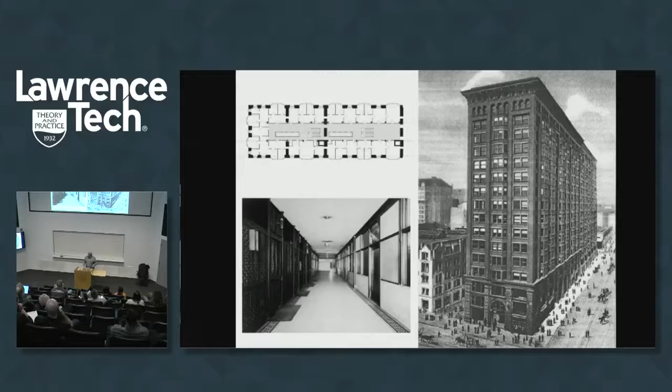Once air conditioning became so widely used, we suddenly just became ignorant as architects. We just said, you know what, we got air conditioning, just do whatever. And this building, the Seagram Building, beautiful building, but its plan has nothing to do with performance.

If you compare those two, just look at the lobby space between the two. There's not a single window in the Seagram Building. There's no natural light. Everything is artificial. So it's like, what do we really want to do? What kind of spaces do we really want?

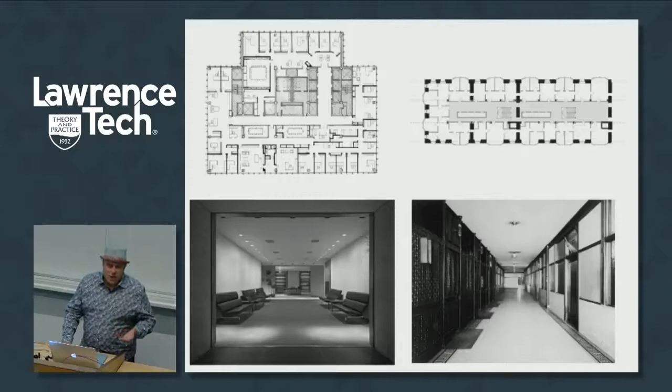So I look around at other things. There are a lot of great examples of buildings that we can learn from, and this is one thing I want to talk to you a little bit about tonight, is about looking.

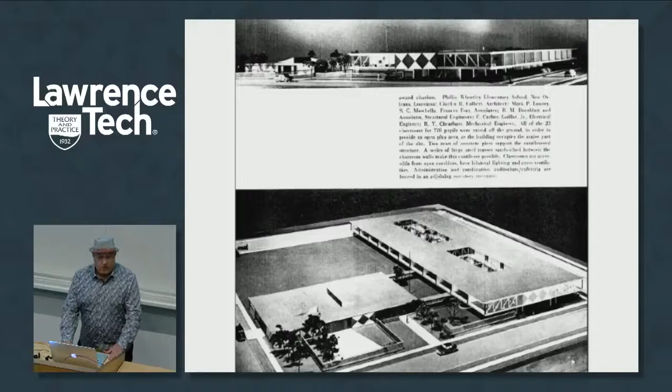This is the Phillis Wheatley Elementary School in New Orleans, done in 1953 by Charles Colbert. And it's a beautiful building, but if you look at the plan, it's almost exactly like the Monadnock. And it was that way for a reason, because it was designed without air conditioning. It's this wonderful building with lots of natural light, cross ventilation, and really, really a beautiful building.

And this building was around for the longest time until some smart person said, you know, it's a little warm inside here on days. We should just put air conditioning in and it'll be a lot better. Well, this is what it looks like now. So what happens is the building's not designed to be air conditioned. And so as soon as we feel a little bit uncomfortable, we want to throw things away. And this building will probably face the wrecking ball here very quickly.

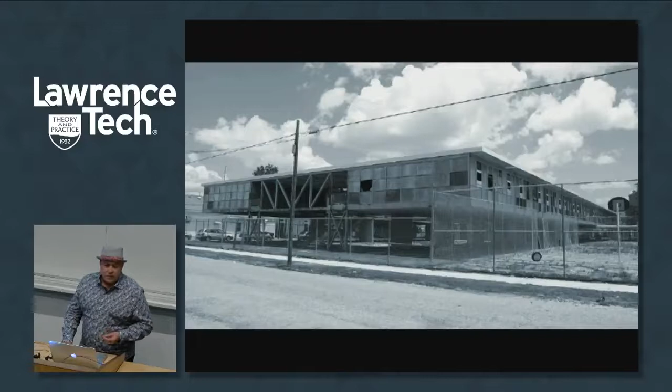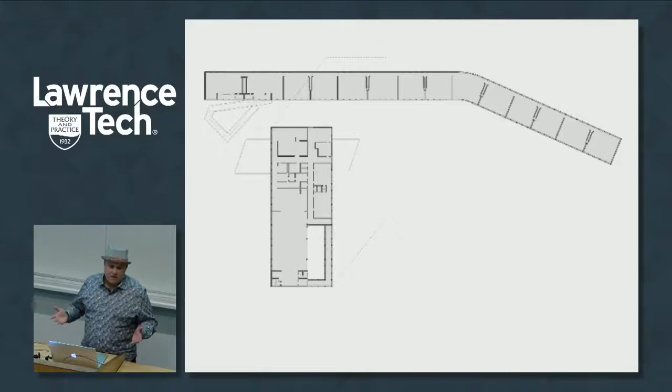Another building also in New Orleans, done by the same architect about the same time, another school, is a brilliant design in New Orleans, raised up, created a shade porch. And if you look again at the plan, those two little lines in there are actually a stair, goes directly up. No circulation in the building at all. Glass, cross ventilation both sides. It's just pretty magical.

So point is, what I tend to do is when we start a project, I look at other things. And I'm showing you some of the things which were some of our research before we did a school in LA. And so we did this small charter school. It's a 500 student school in a very tough neighborhood in South LA.

This school is built on a site that is 1/15 the size of a typical school of its size. So it's basically an infill lot, but it has a lot of those things that I just talked to you about. If you see the plan, the long arm faces into the prevailing breezes, so it actually scoops the air between the building and induces airflow through that passageway in the middle. It's also south down below, so the building actually is shaped to shade the public space outside to the north.

So this is kind of a diagram of it. It has 600 solar panels built into the south facade. And you can see the courtyard to the north. My staff actually put the shadow on the wrong side. We can build them, but we don't know how to draw them.

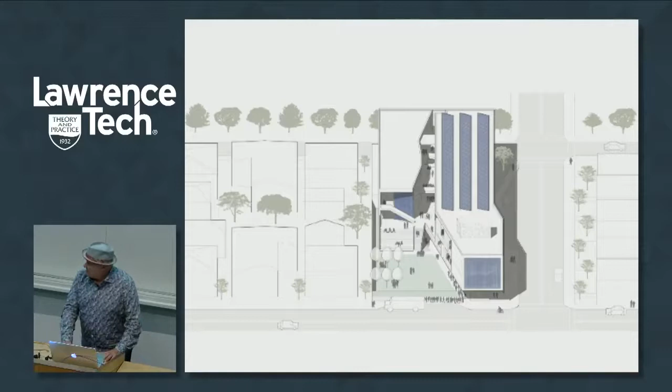The building, as you look at it, you can see the north side shaded. The west looks like it's solid. This is what the west facade really looks like. It's a very sculptural piece of the building, but it's just 2-inch steel fins, and they're spaced in a way that they provide soft natural light into the building. And so you get classrooms which have views, they have privacy, they have natural light. They rarely turn the lights on in these classrooms.

And this building, because of its low usage of lighting and the solar panels, produces about 80% of its own power. But I always look at these things too as an architectural opportunity. The idea that it can be both performative and aesthetic really has made it almost impossible for our clients to value engineer our projects.

So like in this case, they're like, wow, the solar panels cost a lot of money to put on there. So I said, all right, let's take them off and see what happens. Well, we took them off and reran our energy calcs with no shade on the south facade, and the mechanical system cost went up almost to the cost of the solar panels. So the client said, oh, now I get it.

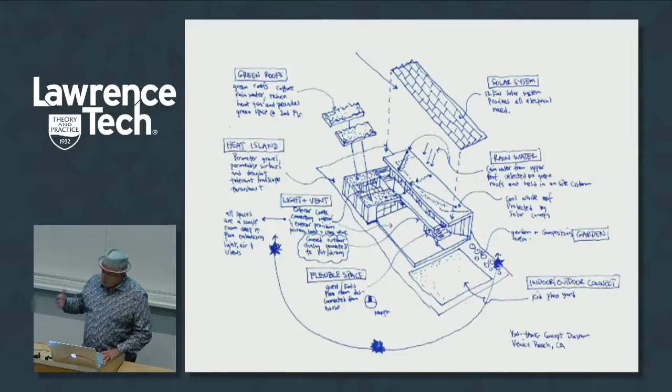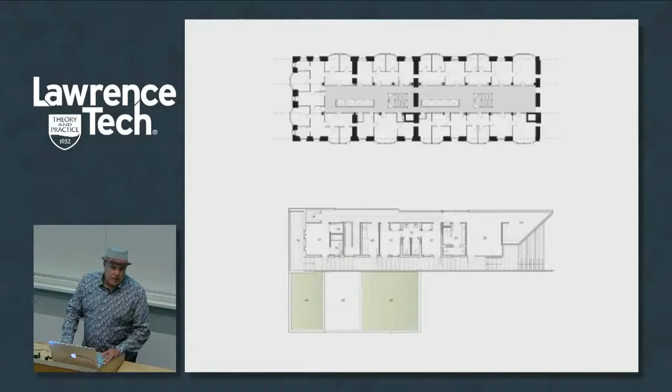So on a different scale, this is a house in Venice, California, and it embodies a lot of those same things. If you look, the upper roof has solar panels, the lower roof has a green roof. All the rooms are single cross ventilation. You could see kind of the plan here. Every room is just one room deep, and it has either a courtyard or air can pass through both sides. So you can see, again, it's very close to the same principles that you would find in the Monadnock building or many other buildings from that period.

This is how you enter. You come through a courtyard. This is their office space. And again, it cross-ventilates through that courtyard. And if you're in the office, you can actually see through the living space. So they can be in the office, watch their kids in the backyard. They can even, when they open the doors, yell to them from across the house.

And then the whole building actually opens to the garden. You can see the green roof. And the bedrooms are small. We basically made the bedrooms really small on this so we could put most of it in the public space. All of them open out to this walkway. The parents' room is on the very end, so when the kids try and sneak out, they got to get by the parents there. But you could start to see the solar panels emerge on there, the green roof.

And then these are the bedrooms, again, all shaded, small, lots of light. I always say to people, who doesn't like natural light in here? Who hates fresh air? It's just common sense to do it. So we kind of do that on everything, even when our clients don't care about it. So there's the house, and we made it like a sort of big villa. It's 2 stories, but we made it look like a big 1-story villa. And you could see the shade pattern on it, that all the openings are protected.

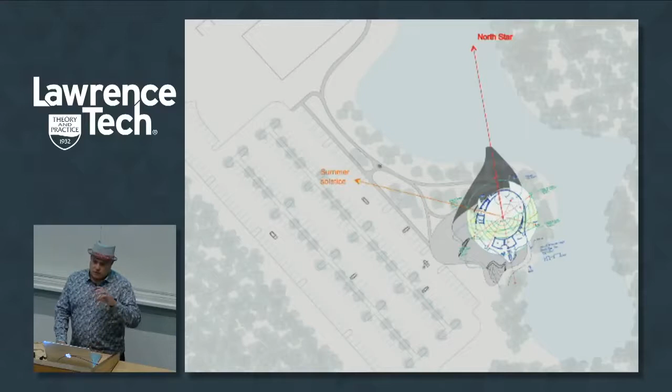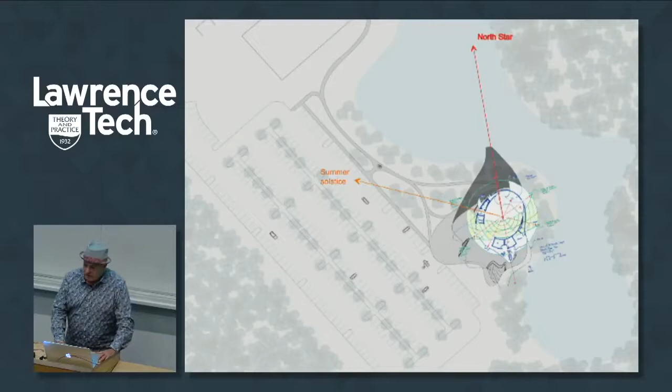We kind of looked to more things, even, well, you'll see it here in a minute, how we placed the building on the site. So where we had not just the view to the North Star, but we also made the building so that the summer solstice would go right through the building. So one time a year, you could actually stand outside the building and see the sun setting through the building.

We also just finished this building in Cedar City, Utah. It's a $50 million arts complex, and they've got these beautiful, red mountains there. And if you visit, the sandstone just from the weathering is just spectacular. So I started to think a bit about that sandstone formation.

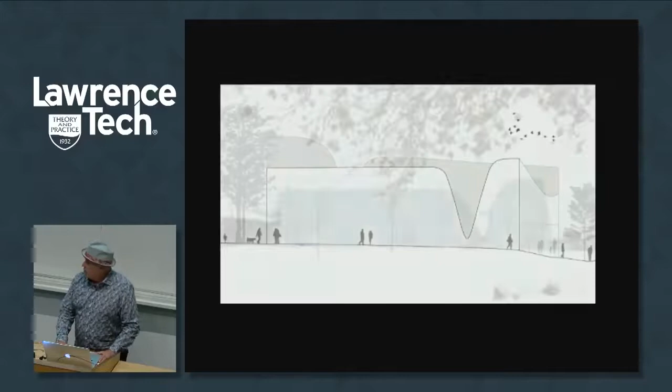That's our site. And so we started to look at these things and how you might be able to transform a building that was a lot like the slot canyons that exist in the neighborhood. So we looked at ways really to have our building be kind of part of the environment that's there. So this part is the museum.

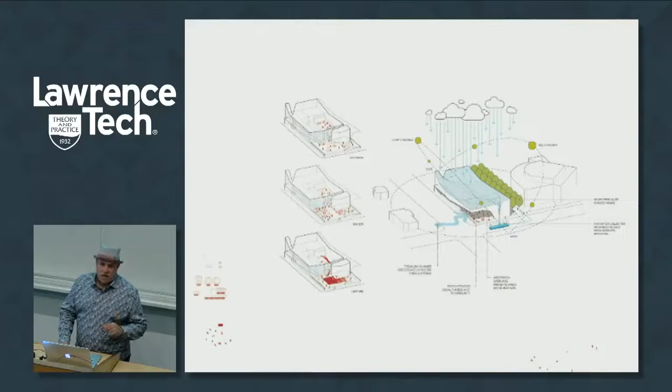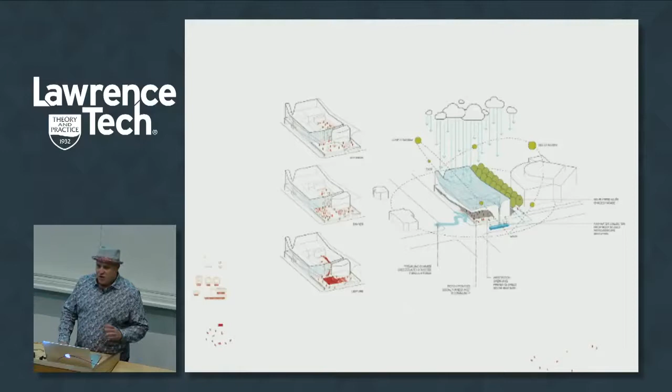It's 30,000 square feet. It's got a big canyon-like roof that has no roof drains in it. They all drain to the two ends of the building, and all the water's collected in cisterns. But my client was very suspect that you're going to put no roof drains in the building. But we kind of worked through that geometry, how you can get all the slopes to flow. And part of it is really figuring out how to build it as well.

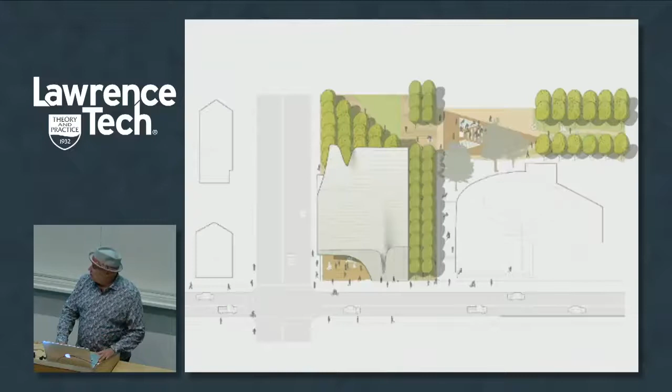So here it is on the site. And I'll show you a little clip of a bit of the construction of that so you kind of get the idea. So it's got the big porch that you're seeing in the front.

Another thing here I'll talk to you a little bit about in a minute is, how do you actually make these forms, or how do you construct them as well?

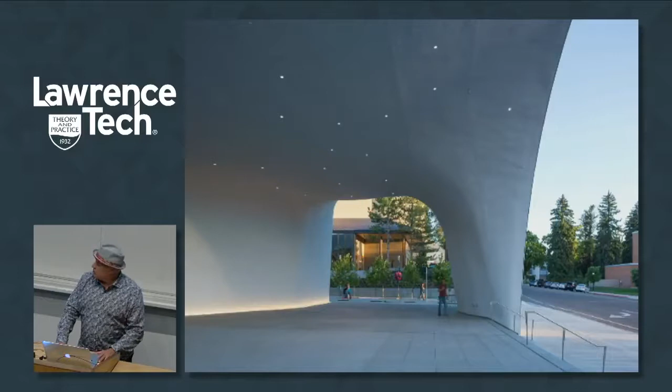So here it is. You can see the big porch, the gallery, and it also has the whole gardens that go with it. But they use this porch here for outdoor performances and events and so forth. And it really connects the campus to the city of Cedar City.

Another thing we've kind of been looking at is this idea of pattern making. And I don't think we really look at those opportunities enough. And I think there's great potential in architecture with pattern making. I mean, they do it with fashion. They make these custom dresses, and they're able to be repeated or altered in a way over and over again. So I kind of started to think more about how can pattern making be part of making architecture.

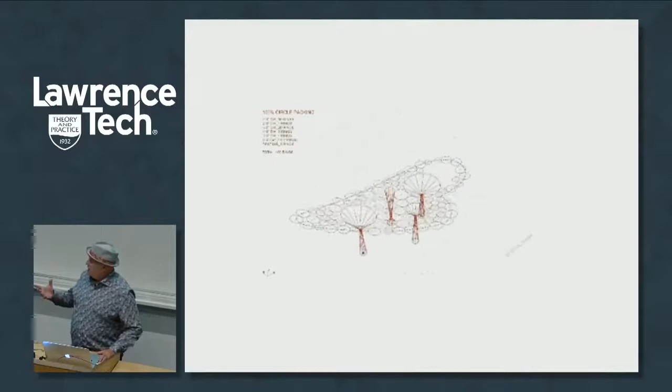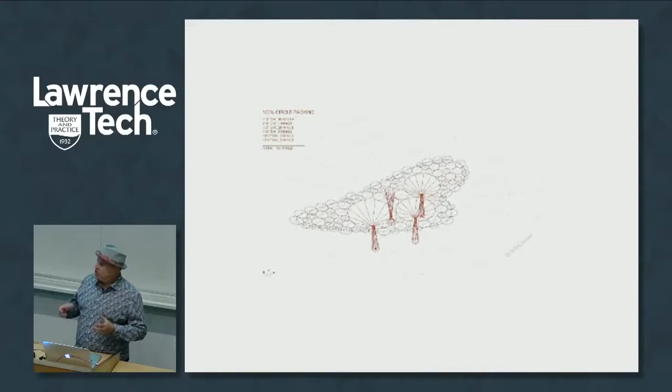And so we wrote this kind of script. This is called the Gateway Sculpture. And we came up with these components, and we said, let's just have the components randomize themselves and form. We'll do the pieces and let them make their own pattern. So all we would do would move the columns around or change a shape, and then everything would repack itself in place. And so that's what we did. That's what we built. So it all then became standardized components.

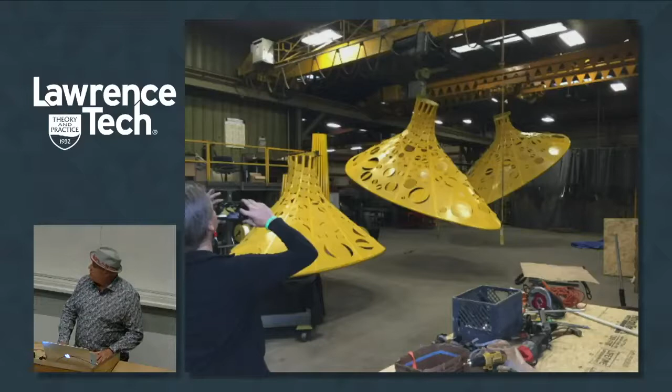We broke them down into these standardized pieces, and we sent it all out. It was fabricated in Denver, Colorado, and shipped in pieces and put in place in like 2 weeks. And it was done very affordably as well. So here you can see them making some of the components, packing them up, arriving on the site, and then there it is in place.

And so I got this job. We were new. We opened a new office there, and they were building a new city hall, and they wanted a gateway sculpture there. And I was the only one that said, I'll do it and have it done in 3 months. I guaranteed it would be in place in 3 months. So part of what you'll learn to do too is if you're successful, you create your own work. So here's some other shots of it.

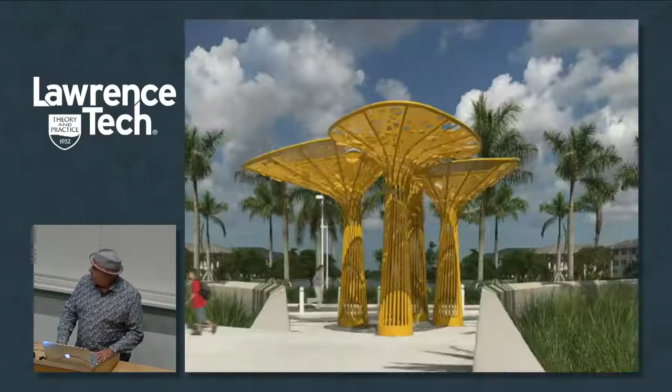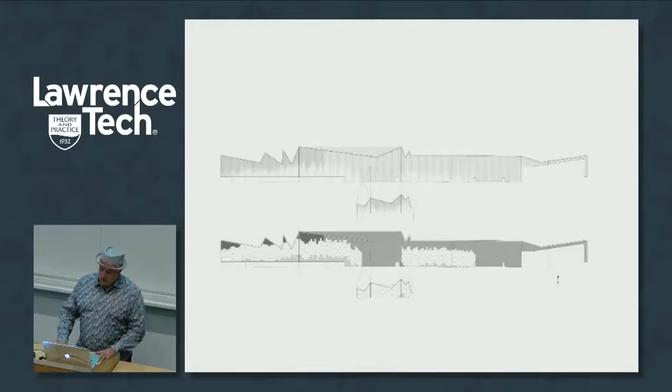So similar with the building, this is an office building we did in Monterrey, Mexico, a very large combination of office and factory. And the mountains there are spectacular, but we wanted to do something with lighting or clerestory on the roofs. So we would figure out a system of rationalizing the roof geometry, and then looking at the panelization of the building, like how do you, again, standardize panels on a form which is really very unique. And so we went through that whole exercise and then worked with a fabricator in Monterrey, Mexico to develop the system.

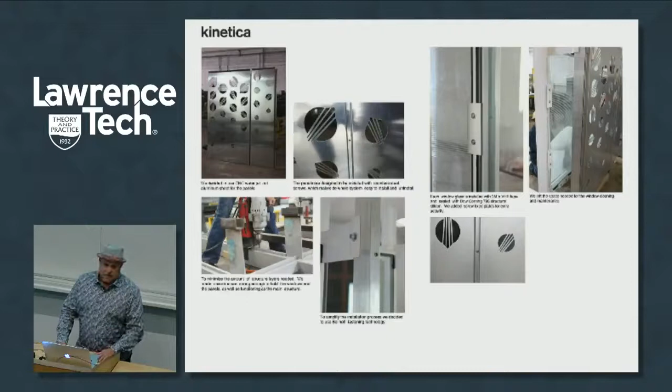So I've looked more and more at this idea or notion of patterns to try and develop a strategy. The projects I showed you were really more like, almost like an artist, where we would just do them in a less rigorous, standardized way. So I started to think, can we do it more in a way where we can do one thing? And so I found these images.

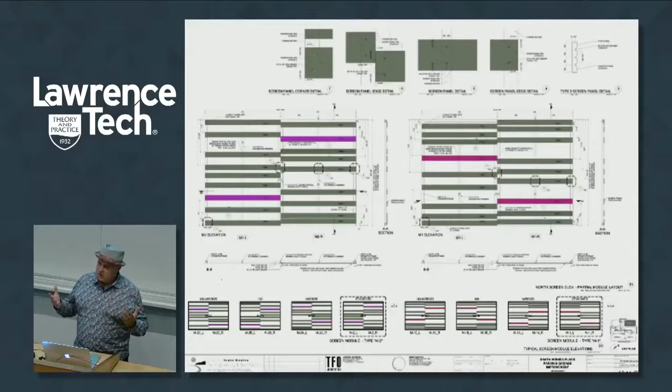Then we got commissioned to remodel a Frank Gehry building in Santa Monica, the Santa Monica Place parking garages. And it's miles of facade, right? And the city wanted to redo it. They didn't like it. They wanted it to be a better city building. So I said, how can we do a facade within this small budget we have and really do something nice? So we came up with this panelized system.

We designed 2 panels. The purple piece that you see is actually a random board where we just got a bunch of random materials and asked the contractor to just insert them. It didn't matter what went in there, just put whatever. And that's a difficult concept for people who build things, because they like it to be exactly what you tell them, because they think you're going to make them redo it because it's not what you said.

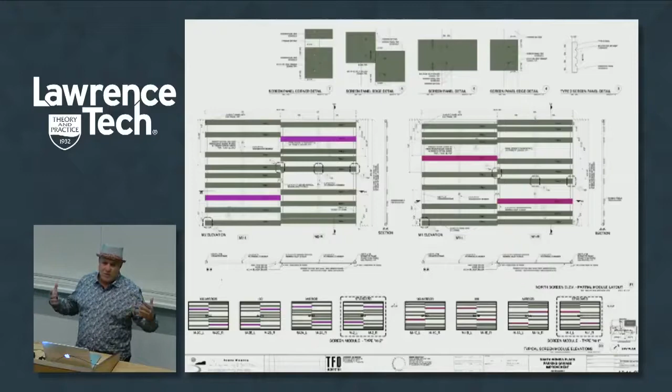So it was publicly bid, so we organized these panels in a pattern so that we could get that variety and be able to do it over 2 very big garages for almost 3,000 cars. So the winning contractor actually prefabbed these things, 1 panel by 40 feet long. So they actually did them bigger than we imagined. And the whole thing went up within 2.5 weeks.

So here you can see we also put some retail on the ground floor. But we gave the building a whole new skin to make it really a better city building. And you can see it here in its place in the city. We also redid the street, the whole thing. It was a fairly big project with the facade being just a component of it.

So I'm always looking at things like this, the little via airmail stamp. It's nothing really, but the shift, that it's not aligned, is really intriguing to me. It's the same exact stamp. How can you do that and still make it beautiful without it being monotonous or boring?

So we got commissioned to do a housing project in Santa Monica, and I started to think about this idea of 1 single unit. That's it for the whole building. And I found this artist named Patrick Hughes, and he did these paintings that he calls Reverspective.

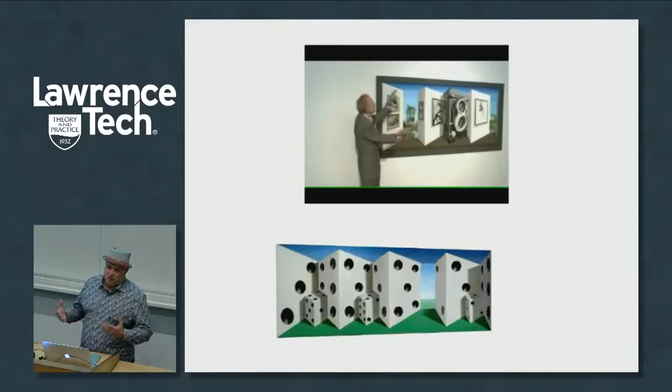And what he does is it looks like the paintings are moving, but it's actually the shape of the canvas. And as the viewer moves by them, it appears that the thing is moving. And if you notice too, if you look at his work, he actually uses very famous artwork in the paintings that he does.

And the whole idea of movement is really fascinating because it's not the painting that moves, it's you that's moving that's basically making the painting move. So that's what I wanted to do. And so I went to a local company, it's actually a big national company called C.R. Laurence, who does a lot of things in architectural products. And I asked them if they would be willing to work with me to design a shutter.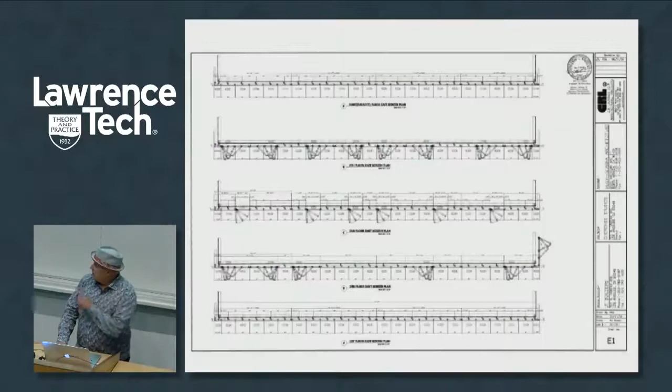And so we designed this custom shutter, and we spent a lot of time doing it, and then we put the one shutter on the entire building. And so it's really a stucco box. It's got a 4-foot porch, and then the shutters are put outside the porch. So we did all of the drawings, the fabrication drawings for this. I just wanted to show you some of them.

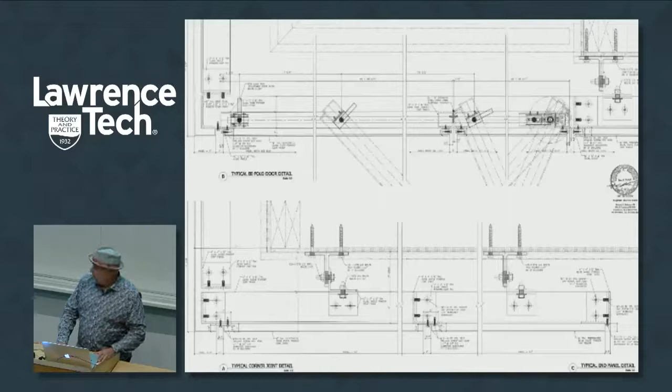These are actually the drawings from which they fabricated, which we created, all the details with them. And you'll see some other projects where we're doing this now more and more, down to the very screw. And why we do that is because you'll find out when you have an idea and you show it to a contractor, they look at it and they go, ooh, that's going to be expensive.

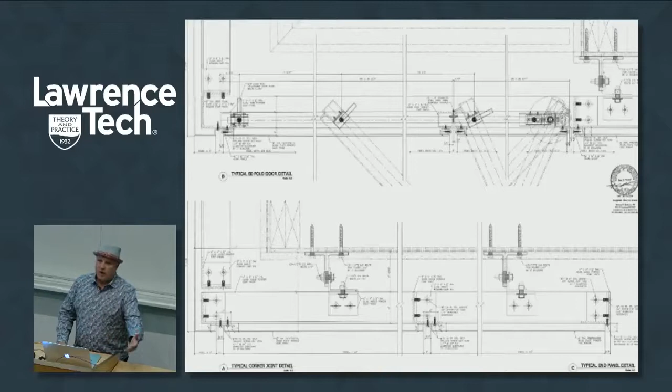And so your idea, even though it may not be expensive, they give a price and the client goes, we can't spend that money. But if it's quantifiable like this, they can give you an exact price. And then you know what it's going to cost.

So what happens is there are beautiful views to the east and west. And you want glass because the views are great. But it's on a busy road, and it's east and west, so the sun just pours in, so you want to be able to protect that. So the shutter gives the occupant the opportunity: if they want to be private, they close it. If they want sun in, they open it.

If they don't care that people see them walking around in their underwear, they leave it open. Those that do, close it. So in a sense, the building gets redesigned every day. So this is really the first one where I think we were able to just take a single module and do an entire building with that single module.

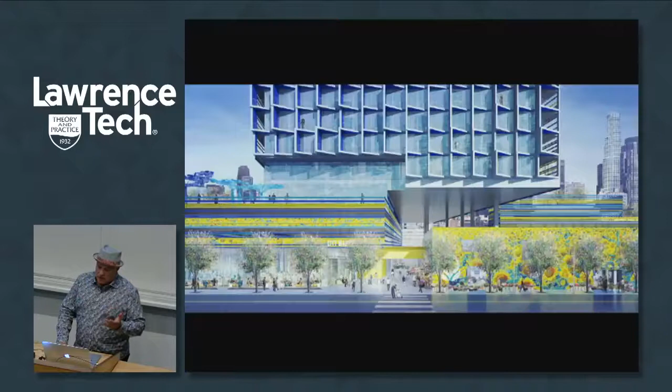This is now one we're working on right now in downtown Los Angeles. It's the Flower Mart, and we're redoing the Flower Mart, but we're adding 325 units of housing. So now it's huge scale. And this is where the contractors count every penny. And so we have this idea for doing the balconies in a strategy which is really the same module. I'm not going to talk to you specifically about that because I have some other ones to show you. I just want to show you some views of that.

So where that's kind of led me to is this idea of mass customization. Well, that's what we call it. Is, how can you do things on a bigger scale? How can you do a design that you want to do and retain that kind of hand craft that Carl talked about that I did early in my career? I still want to maintain that, but how do you do that on public bid projects? How do you do it without getting sued for malpractice and all those other things? So I started to look more about that.

And like pickup sticks, they're just a stick, but when you throw them out, it's mesmerizing to see the way they lay out. So I started to think about the power of a line. And so we started to look at this idea of taking lines and applying it to an idea called ruled surface geometry, where you can put a series of lines together and you can build these really complex shapes by just using a single line.

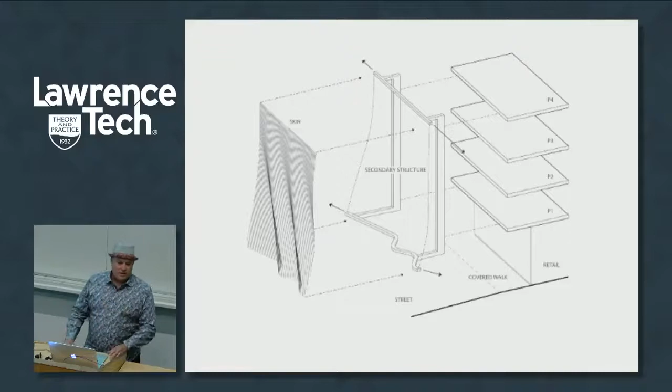And so we started to look at this, and what we failed to take into account is that the building is like 75 feet tall, and you can't span from the top to the bottom with just two chords. You need intermediate chords. And those intermediate chords throw the whole ruled surface geometry out the window. It just doesn't work because you can't rationalize those points in between. So now we had kind of a new problem.

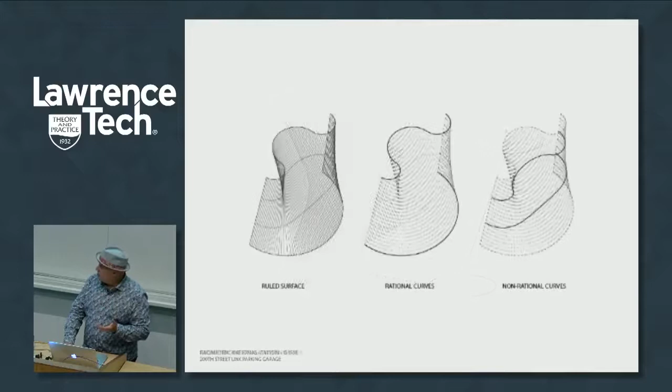And this building was permitted with foundations, then concrete, and so we were basically designing it as we were building it under a guaranteed price delivery. So we were working like crazy to figure out how we're going to do this. And so we started to look at a lot of conditions where you get torsion, and twisting became an issue. So we started to look at how we could rationalize the surfaces and the curves by implementing other things. So we wrote our own scripts to do this, and we started testing these.

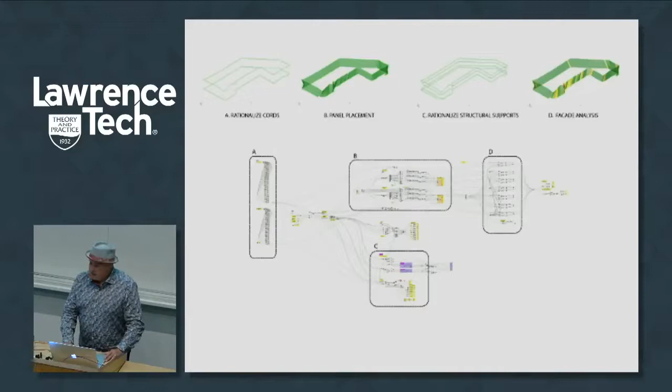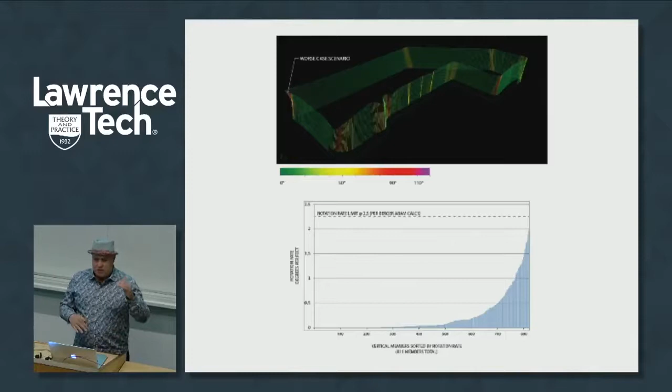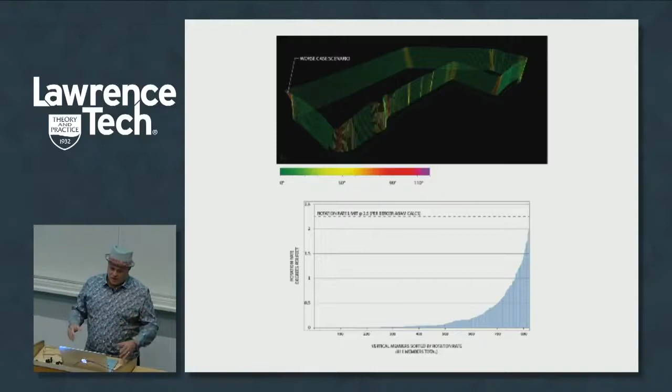But there were so many things that we had to look at. Like, what's the optimal span of the horizontal supports? What's the optimal thickness of the material, the shape of the material? So it was a giant, complicated puzzle that was changing every day as we would build it. So I'm just showing you some of our analysis, and this is close to the very end, and you can see that graph is getting almost flat. There were 8,500 pieces, and only a handful of them were unique in the end.

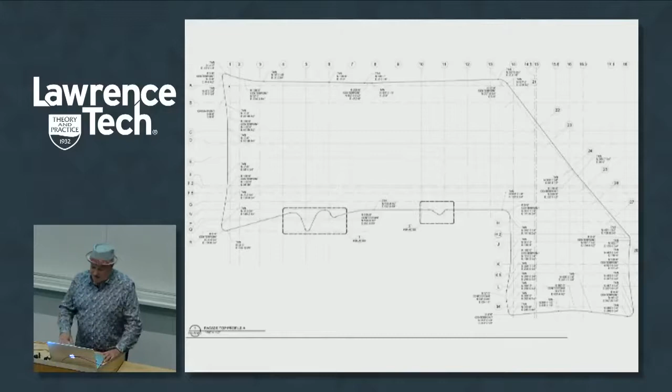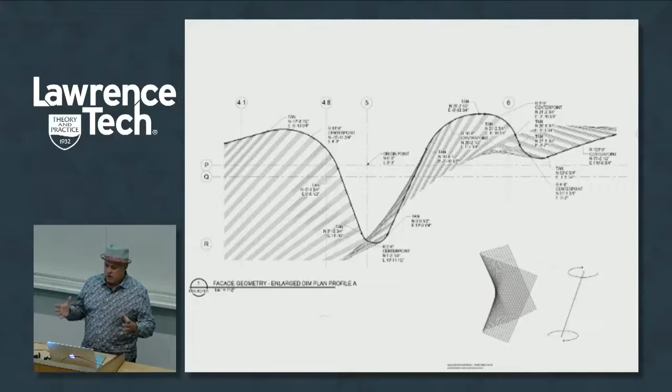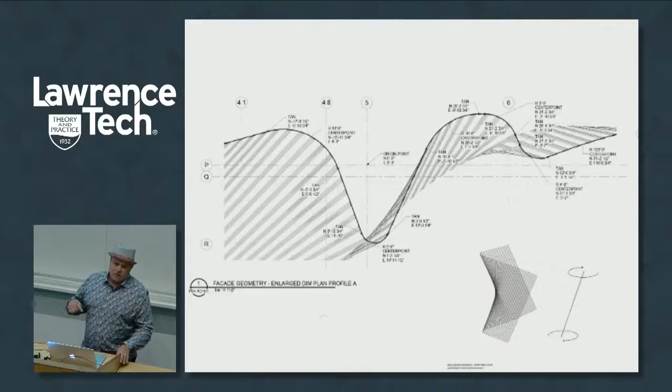So then we would look at our model. We would take all these beautiful rendered curves and go, uh-oh. So we would go piece by piece around the building, take these areas, and then rationalize those curves. So all of the curving components were broken down into only 2 or 3 radii on the entire project. And so we provided all the fabrication drawings for this project. So they went from our desk directly to the sub to bend them.

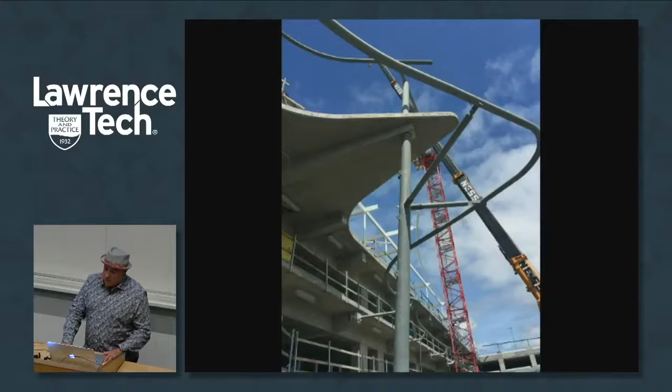So this is how it would come out on the site from our drawings. That's how it would go up. And they just went away with the horizontal supports. So the skin, in the competition, this is what I was thinking it would be. We would just go to the store, find a standard shape, buy them and just put them up. Well, that didn't work either. There were, again, too many complexities to make that work.

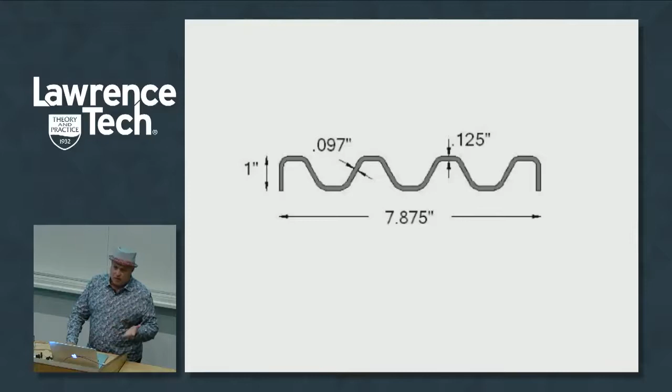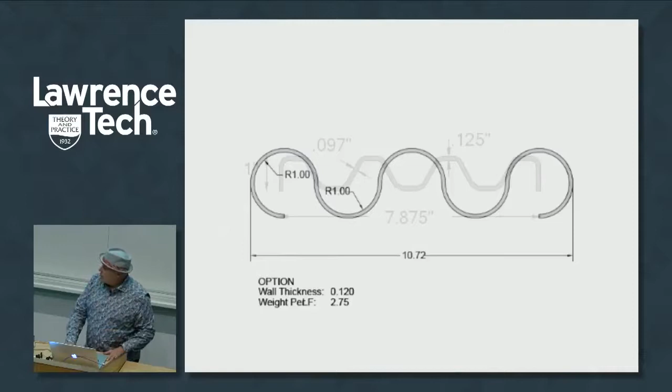So I found this thing called pen board, which had properties that were much closer to what we needed, but ultimately it didn't work. So we started to design our own extrusion. We started to look at a similar shape that conceptually matched what I wanted in the design competition, but that would meet all the parameters of torsion, its ability to span, and was the most efficient weight.

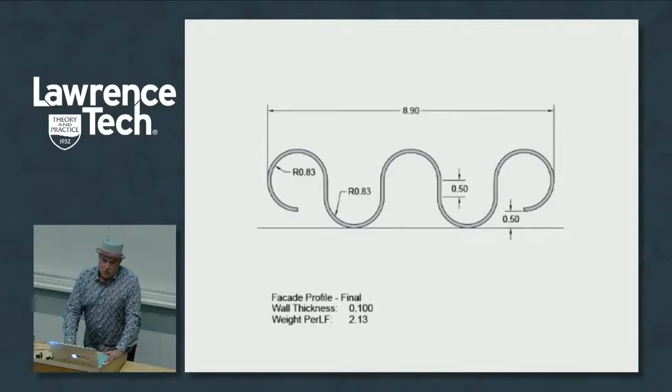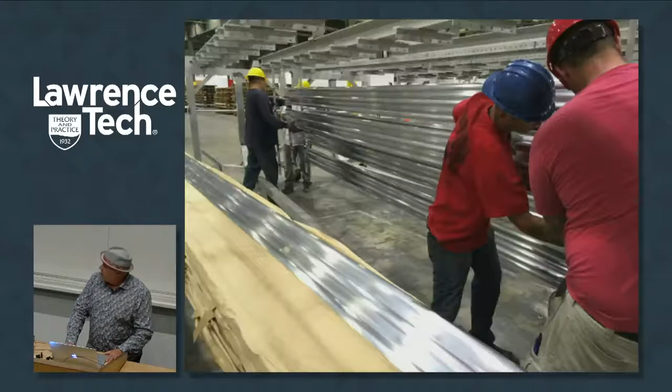So what I'm showing you is how this shape transformed as we modified it, and that was our final shape. So we invested, it was like $28,000 for a mold, and we produced miles of this stuff. So here it is. Here they are testing it to make sure that the properties actually turn out as planned. And then there's our happy contractor over there with the 8,000 plus pieces packaged up and ready to go. So it was a sigh of relief for him.

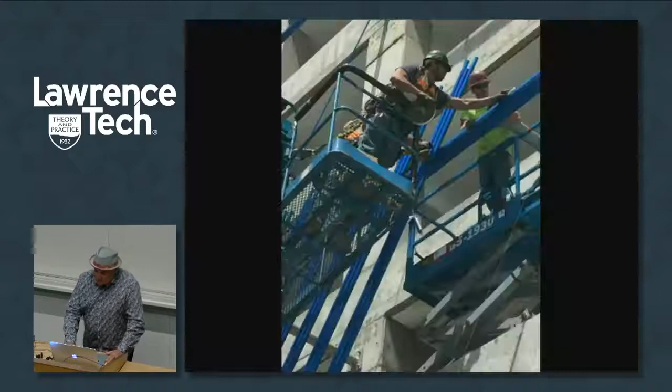And then they put it in place. So all the horizontal supports had a little weld that was computer put on where they're to screw it. And you had 4 guys and 2 cherry pickers, and they put the whole facade up in a week. And so the building too, all these actually change. They're not in the same orientation. So they lean and straighten around the whole building. So they're not vertical, but they're also not the same shape, but they're basically 8,000 of the same exact form.

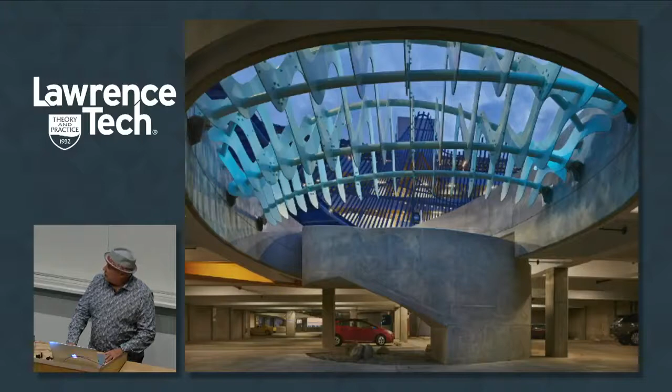So, you know, we also look at this. I call it a little bit of calculated risk-taking. We don't throw caution to the wind and do whatever, but we have what we think we can make work, and we kind of test it and go with it. And I think it produces a lot better results than if you know exactly what you're going to do.

Oops, that's my son, sorry. Yeah, baby. Yeah, baby. Sorry about that. Call him later.

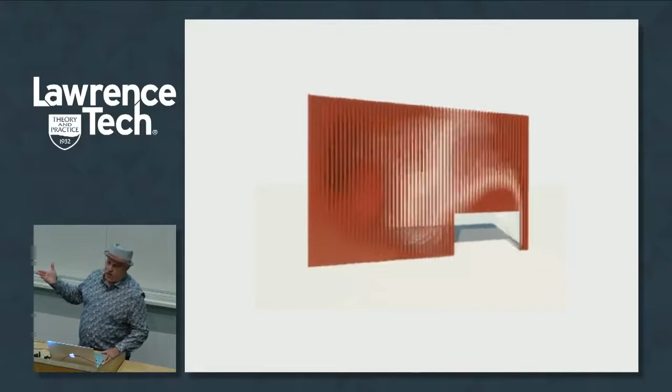So you can see the drawings. This is, again, a drawing of every single brick of the facade. And then we test it with modeling. So here's a piece of a model. And you can't just really have a picture because a static picture doesn't show it. So we would make these little films. So if you see here, the facade goes from solid to void. It changes as the user moves by it.

It's actually changing from solid to void. And the owner's actually moving in this house in about a week, but he's been spending a lot of time there lately. And he says now people come by and they stop their car in front of the house, and then they back up, and then they pull forward, and they back up, and they're trying to look through the brick, but it keeps changing on them, you know. So I thought that was great.

The other thing too is the brick. This is Chicago, and if you look at this building, you notice the brick in the front and on the side are different. All the good brick is always on the front, and then the garbage brick is on the side where you don't see it. So I'm like, we're gonna use the garbage brick. They call it Chicago Common brick now.

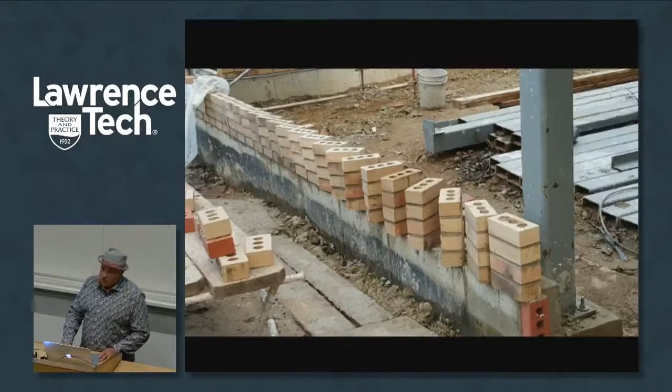So here it is in construction. And the same thing when the mason looked at this, he goes, oh my God, how am I gonna do it? When he saw a model. But then we showed him an actual diagram of how to do it, and he's like, oh, that's really simple. And he got super excited about doing it.

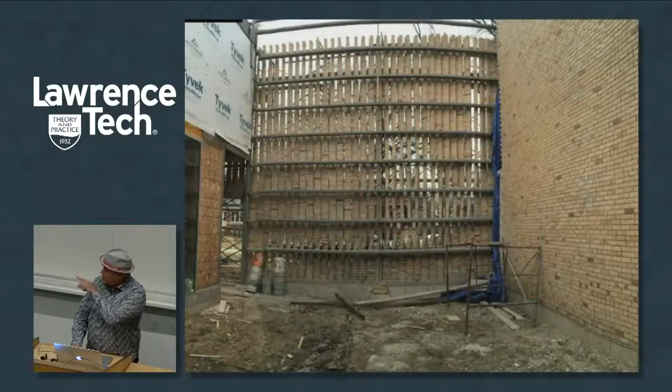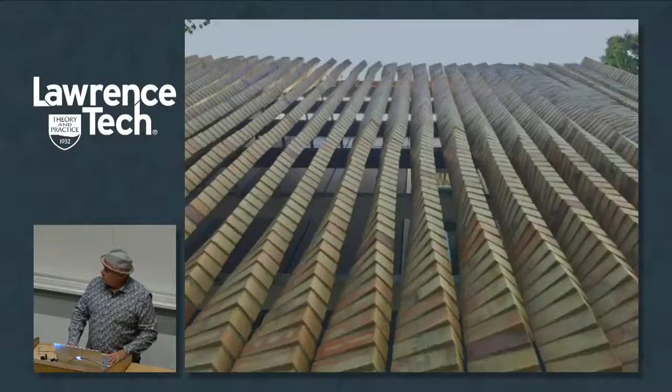So here it is in construction. These are just 1x tubes horizontally. There's no vertical support to it. They just help in the lateral direction. So here you can see it. And then that's Robert. And what also helps is the light comes through it from the back. So as the sun moves around, it actually enhances that moving as well.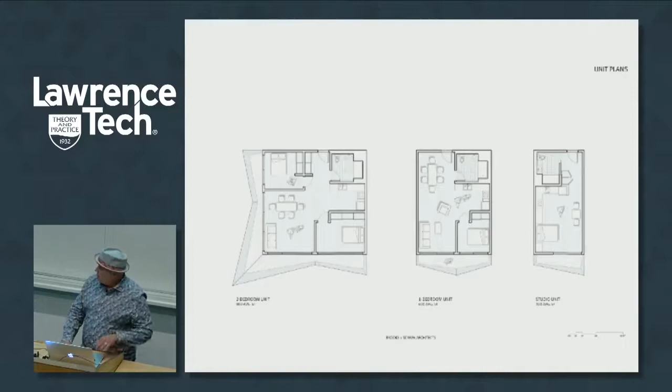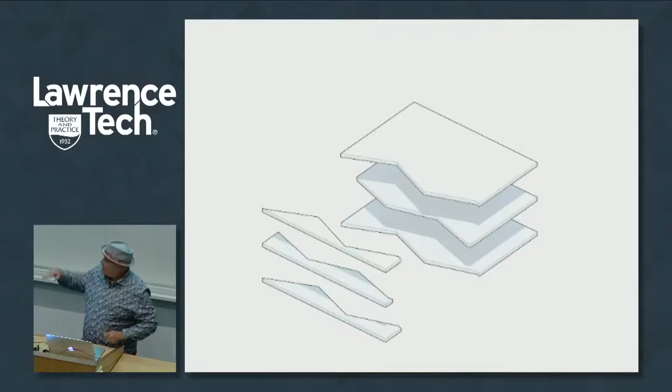But we just took a typical concrete slab building, and we basically formed them differently. There's a repeating pattern of forming on each floor so that formwork can be reused around the perimeters. And those are shaped to then connect vertically to form the balcony. So you get this really dynamic building, which is nothing more than just tilted edges of concrete.

So it's our costs. Again, our owner was very fearful when looking at the costs of this, and then when the costs come in, they're shocked that it's not more expensive than it is.

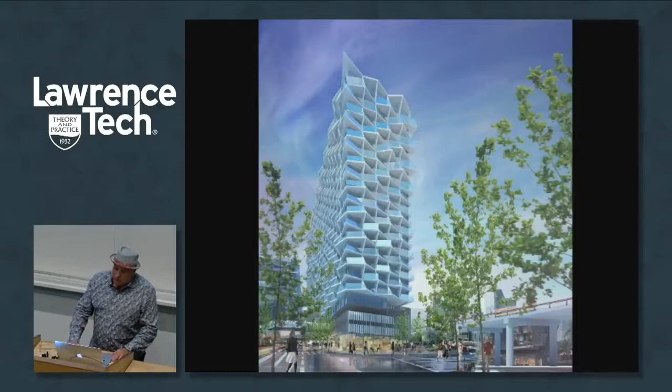The last thing I'm going to show you is a project we're doing in Florida. About 2.5 years ago, we opened an office in Florida, and we've been working on what I think are some really important issues that are happening not just there, but in coastal areas around the country.

So we were hired by the city of Fort Lauderdale to develop a long-term resiliency plan for them of how their city can deal with the sunny day flooding and sea level rise over time, over the next 50 to 100 years.

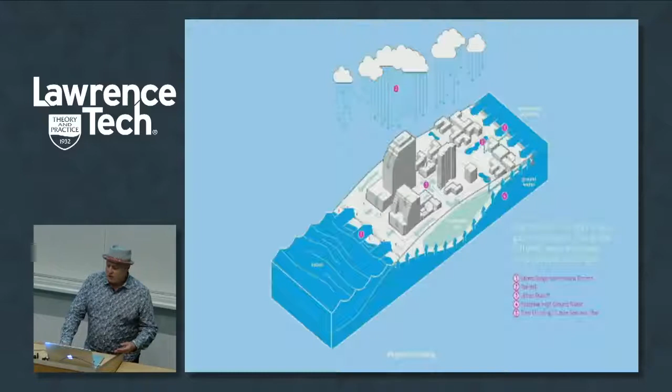So this is the basic problem that occurs. You have rain, right? It rains a lot in Florida, so you get attacked from the sky. The sea level's rising, so you're getting attacked from the ocean. And the groundwater now is rising, so it's coming from all sides. It's impossible to really stop it.

So we've done this modeling throughout the city showing what different stages of conditions would happen at so many feet. We've been working with the city to establish what rise we want to design to. And we're basically now looking at the city as if they're going to have 3 feet of sea level rise in their city.

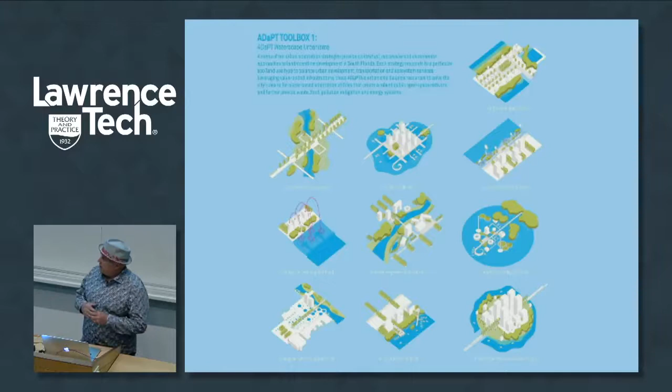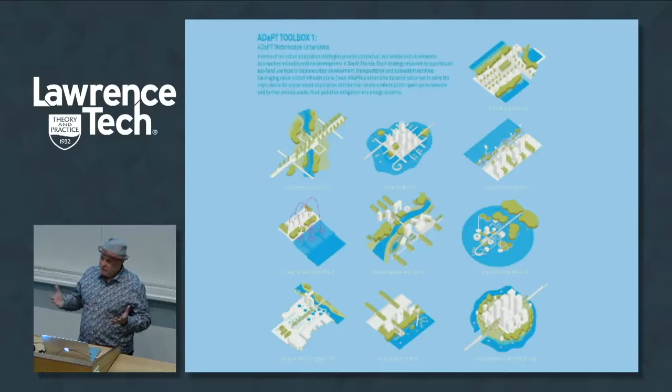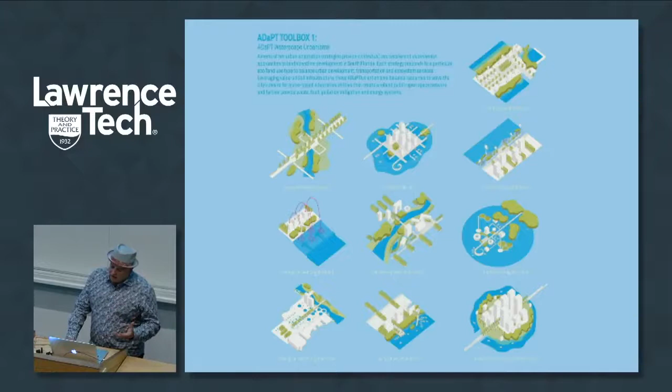So the first one is this really simple strategy where you're dealing with conditions where you're localizing the flooding. And then there are other ways, like reintroduction of landscapes that help with this whole issue. So plants that can take the salinity of the water, and also other plants that have high levels of evapotranspiration, like oak tree. Scrub oak in Florida can evapotranspirate, one tree, like 600 gallons per hour. So it's pretty amazing what you can do.

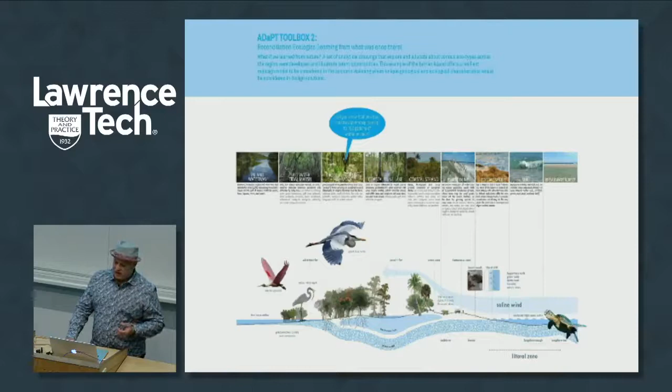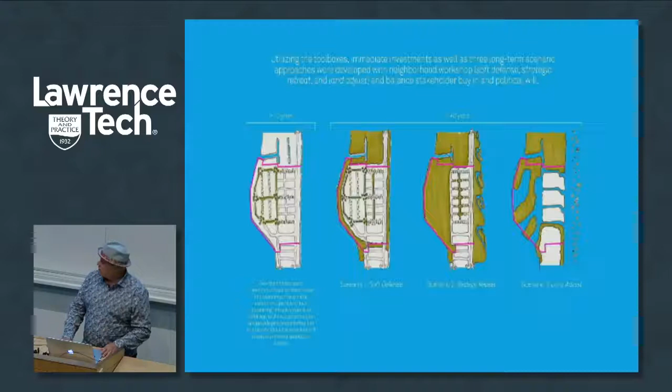So I'm just showing you some of the toolkits which we're developing, and the end product is going to be a book that the city will use to show private developers and people what they should be doing when they develop buildings. So these are the stages, 1, 2, 3, and 4: you fortify, then you retreat, then you abandon, and you rebuild.

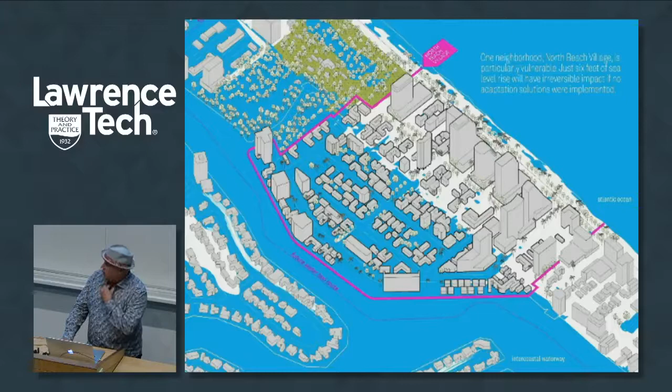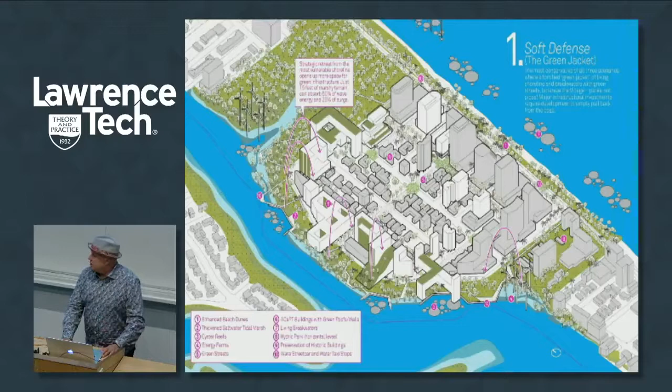So we've done these mappings all over the city, looking at areas, how to deal with it and what it might look like. We won a national AIA award with this project this year. So here's the defensive, the first thing that you would do. This is over the next 20 years, the way to do it over 20 years.

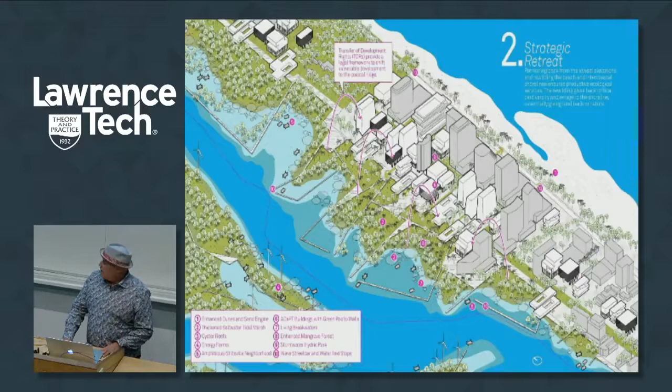And then the following 30 years is to begin a strategic retreat in areas and let the water come up. And then these are adjusting as the water rises. Everyone thinks buildings are permanent, but they're really tied to a mortgage cycle. There are very few buildings that last more than 30 years. They tear them down or alter them.

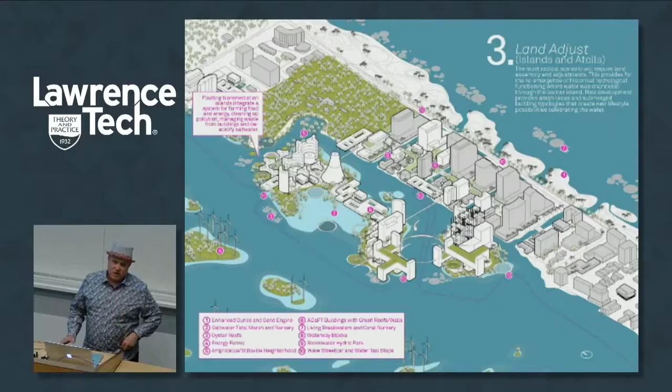So it seems like a catastrophic thing, but you could take Detroit and look at the history of what's happened to Detroit over time. Buildings come and go, so it's not as dramatic as one would think. These again are some of our toolbox strategies that we're developing.

So you remember the hurricanes last year that hit South Florida? We were in the middle of working on this. And the city of Fort Lauderdale had just spent $4 million doing a beach renourishment program, because they're losing sand, and they can't even get the sand out of the ocean anymore. So they go to Central Florida, truck it over and put it on the beach to make their beaches bigger. So they just spent those millions of dollars, right?